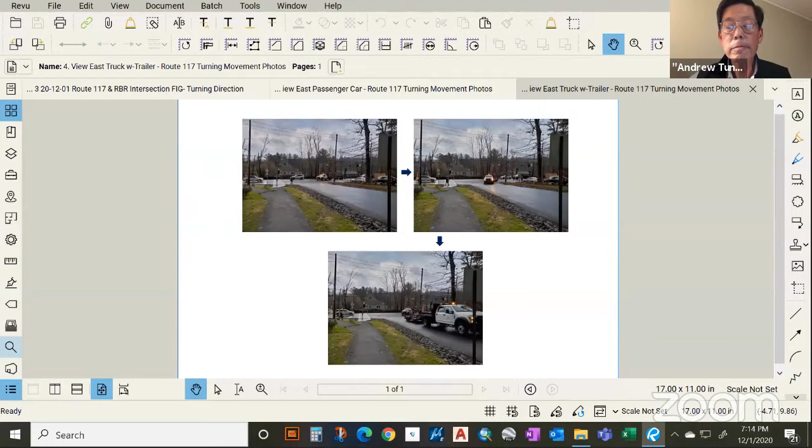The existing conditions on Roaring Brook Road: there's approximately an 18-foot receiving lane for vehicles turning onto Roaring Brook Road, which is quite wide for a single lane road. Then there is a 10 to 11 foot space between the edge of pavement and the stone dust walkway that was installed as approved by the planning board. Then there's the crosswalk across Route 117. So there was the concern about turning traffic and the potential for traffic to leave the travel way.

So in consultation with Maser, who designed the intersection, when there's a no curb condition, the walkway has to be over 5 feet off of the travel way, which it is. In this case, it was designed to be further away. I'll go to some photos in a moment, but you'll see in the photographs there is a stone filter strip for drainage along the side of the roadway that extends over 100 feet down Roaring Brook Road.

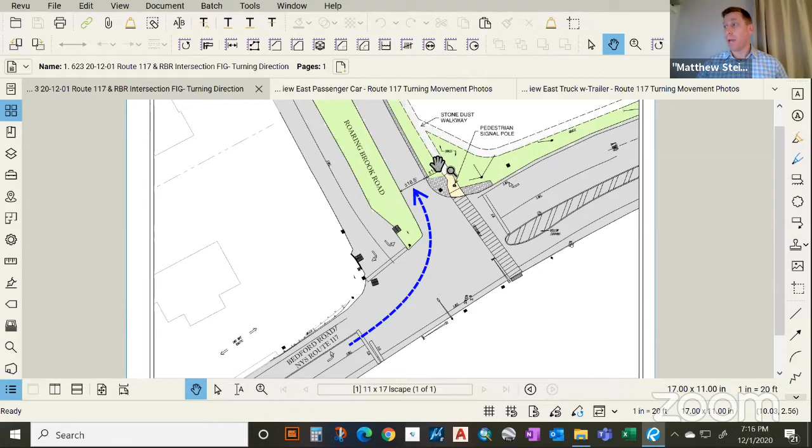It's traversable. A car could travel on it, but it essentially acts as a travelable shoulder that is both a visual and a tactile separation between the travelway and that walkway, in addition to the separation and the distance.

So we went and took a look at the conditions of turning traffic just to observe how cars make that turn, because it was a concern whether or not a car could track further into somebody walking along. So this is showing a car making that turn from that turn lane, and then as it tracks down Roaring Brook Road. And in all the conditions that we observed, all cars were either set in the center of Roaring Brook Road or actually over to the left.

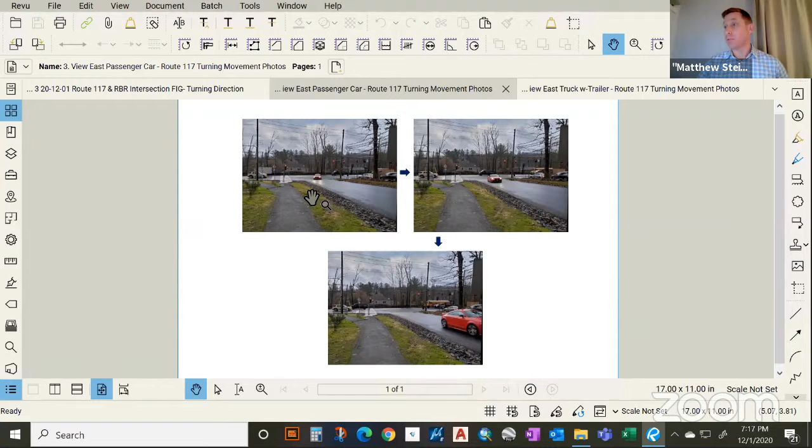No vehicles actually tracked far over, and had any car tracked a little further, if a driver wasn't paying attention, they would actually cross onto this stone interface between the grass strip and the travelway, and that would obviously catch their attention, much like a rumble strip would.

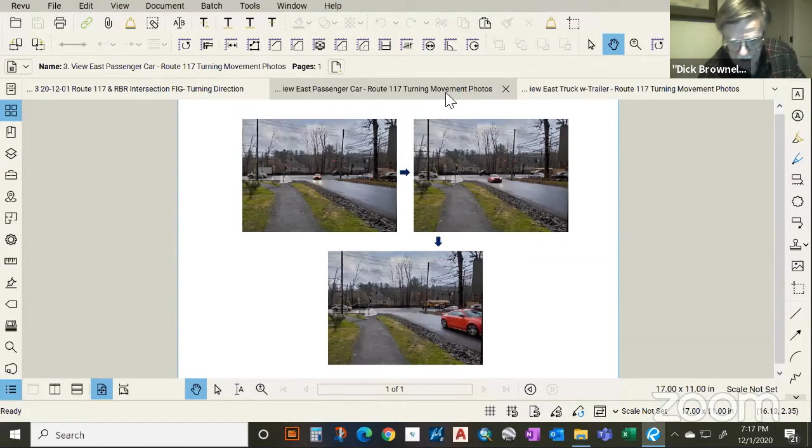Excuse me. My problem wasn't there. It was only down at the corner. I agree with this totally, that there's not a problem along the drainage thing. So we looked at cars turning. So you're talking, Mr. Brownell, about this location, right? Yeah. So obviously, even if there was a curb condition, because of ADA, this would be down with a ramp. So in this area, it would obviously be lower and closer to the road.

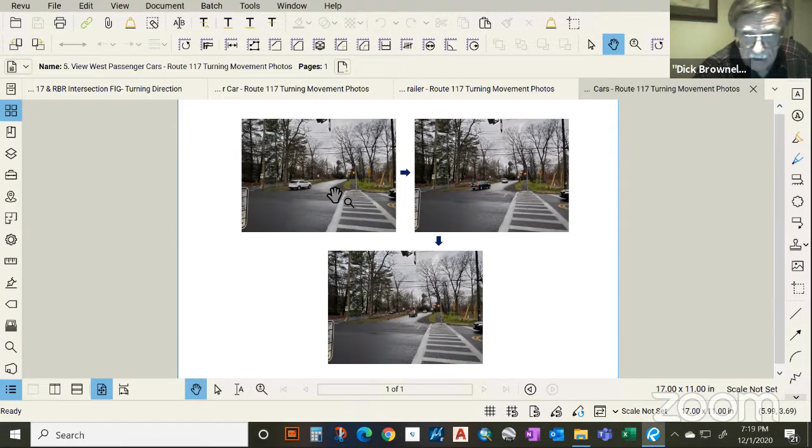But again, that's not where I'm worried. I'm worried to the right of where that white car is. If the guy comes in half drunk or something and doesn't make the turn right, the first part that you described, there's a lot of visibility for people walking down, and they have plenty of time to move. At this corner, if they just don't make the turn because they are distracted totally by texting or whatever, I think it's missing one bollard to really make it more protective. Right now the pedestrian post that was put in acts like a bollard, so that helps me partially, but I certainly think another bollard would be better.

So can I just interrupt here for a second? Because we talked about this, I thought, sufficiently to get the point across at our last meeting. For some reason, the communication didn't get down to a solution. So we're talking about a problem. Now we're talking about a solution, or it sounds to me like an excuse to accept what is there, but doesn't really deal with the problem. The problem, what I think Dick rightfully points out is a concern, is that, and it's not just somebody driving around this corner and using examples of going out and watching people do it.

It's a matter of, in the snow and in the rain and icy conditions, and Dick's other example, people maybe just not paying attention. Somebody slipping sideways through that intersection, because people do tend to drive fairly quickly down this road and making that turn, trying to beat the light. We talked about this last time. I don't understand why. Right.

So we went to look at the condition because we understood that there was a concern of turning cars. This one has a sufficiently wide turning area compared to many roads where there'd be two lanes fit into that same location. Because of the speed and the design of the road, DOT does not allow obstructions in the right of way. Based on the speed of this road, an obstruction would have to be 14 to 16

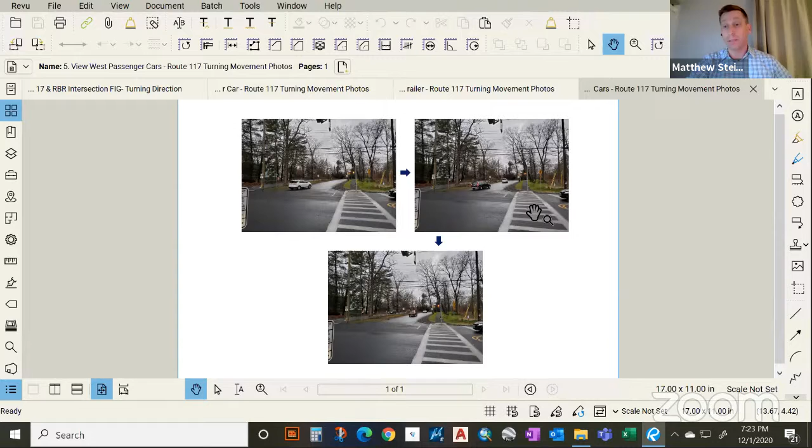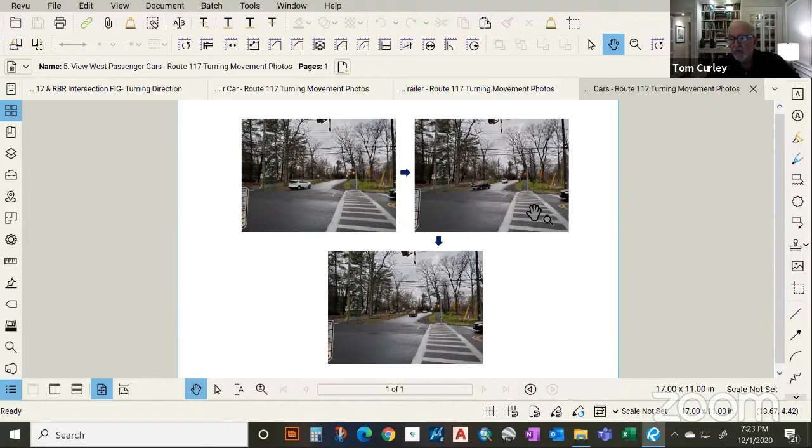This is also an 18-foot lane to turn into, where in many places it might be 11. Other lanes getting onto Route 117 are less than that. It doesn't matter whether it's 18 feet or 20 feet or 15 feet. Once a car starts to slide on ice, it's gonna go until it decides to stop. I don't think we're really addressing what the concern is. If the answer is we can't solve the problem, even though we would like to, then that's the answer. But trying to talk around the problem, I don't think is going to get us anywhere. We can move on if you're telling us we can't do anything about it.

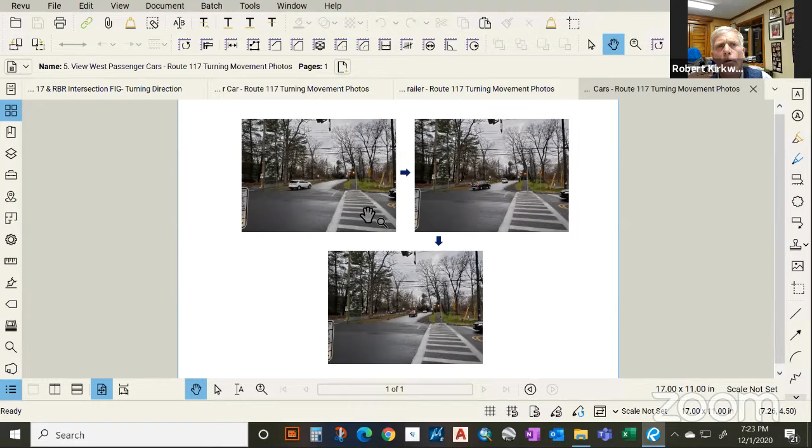Well, I have a question on that, for Matt and probably Bob Scioli. Where does the DOT jurisdiction end on this? Because Roaring Brook Road, as I understand it, is a town road. So where does that jurisdiction end on 117 for the DOT? How far along the roadbed of Roaring Brook Road does it end at the corner? And is it possible it's outside of the right of way of 117 and in the right of way of Roaring Brook Road?

And perhaps it is within the jurisdiction of the town to say, okay, we may not be able to get as many bollards as we like or exactly where we want them, but perhaps we can come up with a solution that's within our jurisdiction. So, Robert, usually in conversation with the state, when we're working with the Chappaqua Hamlet improvements, they usually have so much jurisdiction, so many feet in from the intersection point. I don't know exactly what that number may be in this case, but I think it may be worth the effort to get an answer from the DOT about the planning board's concern about that corner, let them know what the concerns are, and let them write back to say yay or nay.

So at least we have it on record so we know where it's coming from. We'd be happy to review that request. Excuse me? We'd be happy to review that request.

Yeah, I think the applicant, to the board's concerns, should prepare some sort of letter to the DOT and have DOT respond back to the town or the applicant. So at least we have it on record that they have good reasons for why it can't be put there. I mean, they're the experts and they looked at this thing during design. So let them come up with the answer to it. That's my recommendation.

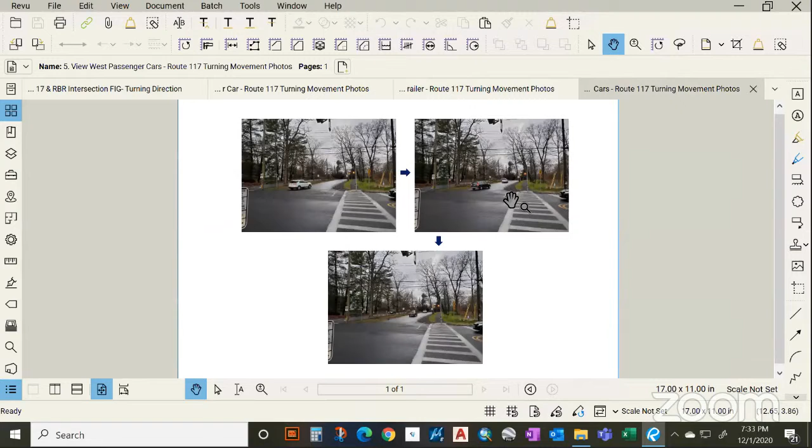So I have a quick question. The stone, how wide is that right now? So in this instance where it runs along Roaring Brook Road, it's 2 feet in width. So in this area, it ranges from 10 feet down to the corner. Yeah. And there's also a gradient going down, right? So if we're talking about a left turn, there's a gradient. So as far as I remember, yeah. If you really look at how the vehicle would turn, you do have some room there. I don't know enough about the bollard and no bollard instance, but I do think the 2 feet would significantly slow it down the way I have seen that. I've done a walk around there.

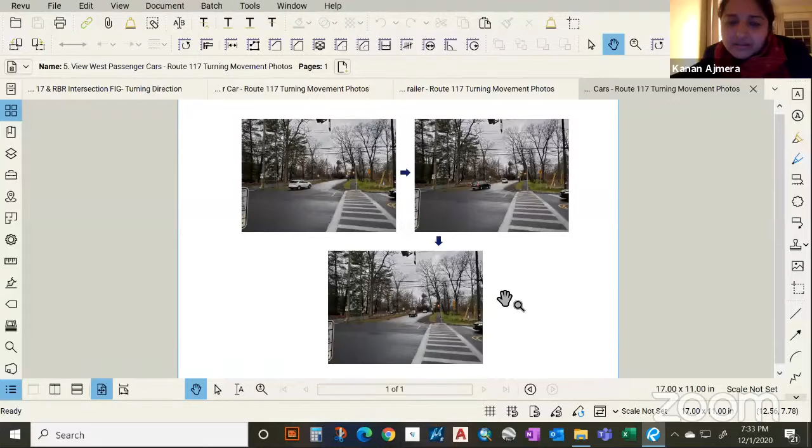Where would you put the bollard if you were to put it in? I'm curious. I think the bollard would most appropriately go to the left of the signal pole. And if you can go back to the plan. Yeah. So this is the pole right here. To be able to protect somebody standing right waiting to cross. Yep. Unfortunately, and we can ask the DOT that, they do control the land that the signal pole sits on. So I believe they control the land between that and roadway paving.

And so our concern is somebody walking on the path will not have a chance to react, correct? If they happen to be on the wrong side of the signal pole. The signal pole, as Mr. Kirkwood points out, I think acts as protection. And just recently, I'd like to add that the DOT on their approved punch list to us had us relocate that signal pole to its current condition, which is more in the pathway than it was before.

In fact, the concrete base for that signal pole, because of field conditions when it was originally installed, was much larger and would have probably given you the protection that you're asking for. But they had us actually demolish it and move the signal pole into the walkway because they thought that signal pole base was too big, and they didn't like where the signal pole had ultimately ended up because of the stormwater and everything else that we had to deal with out there.

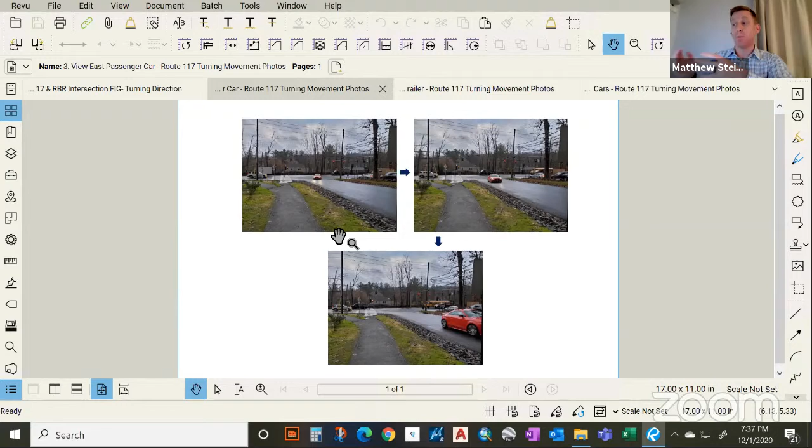Yes, the stone is 2 feet here, and then about another 6 feet. So it's 8 as you get further up Roaring Brook Road. But as you get to the corner, it flares out a little bit. But it's a minimum of 8 to 10 feet between the edge of pavement and the stone dust pathway here. But yes, it is closer, obviously, at the corner. And I apologize if we misinterpreted Mr. Brownell's concerns. Okay.

I think Eldad's comment is. One last question, I'm just curious. On this intersection, there's a black square. What is that? And then there's two others. Yeah, three others. These are the covers for the signal pull boxes, essentially the controllers. Essentially a small vault, is that what that is? Yes, it's like a small buried vault, so it's just a flat metal cover. It's like a plate. Correct. Got it. So that would not afford any protection whatsoever to a pedestrian then. No, it's probably as low as the rocks. Yeah, okay.

I'm glad you asked that question, Dick, because I was interpreting that as one of the poles. Yeah. That's very important to know. So it really is wide open. Yeah, and Tom raised the right conditions. If it's icy or snowy or whatever, and someone's going a little too fast.

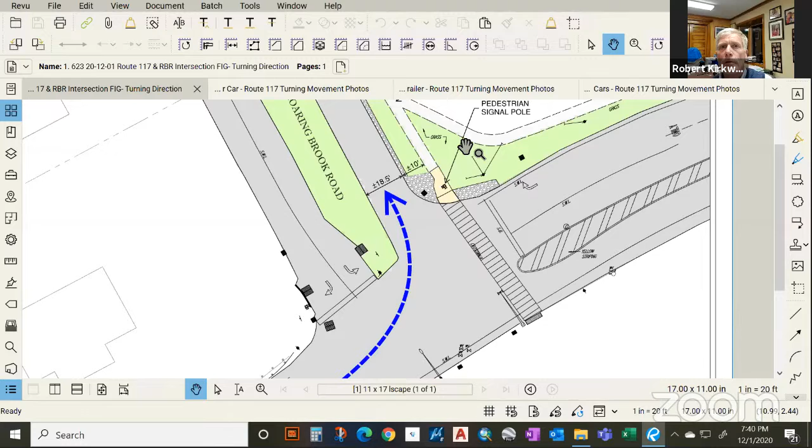So, Bob, would you try to find what the town's jurisdiction is too, and where the town right of way is on Roaring Brook Road on that side, and see where these things might come together? Actually, David, didn't you guys prepare an as-built? Hopefully you have good survey location of this right of way when you submitted it to the town. Is that corner shown, David? I believe that it is, Bob. Okay, great. We should have that, Robert. I will get that for you.

So if I can just add one thing here, not to extend it too much, and really not to be hyperbolic about it, there's a high school right down the road here. And you have kids driving, and I've got a son who, when he was a teenager, slid sideways through ice into a curb and ruined my car. And another one who drove his own car and slid sideways into our garage on ice. Now, we're fortunate because they don't live here anymore.

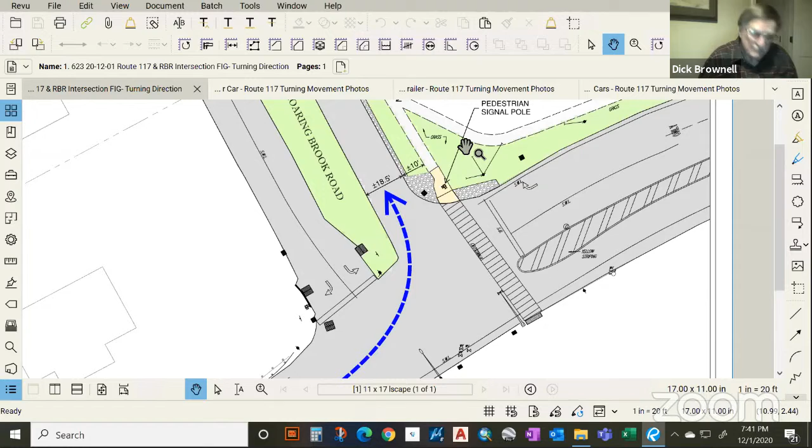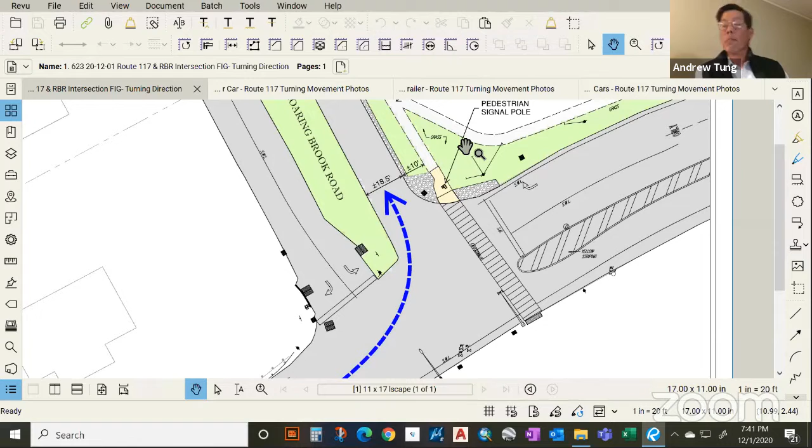But the fact of the matter is that you have drivers here who may actually be inattentive. And this might be a condition which is unlike every other condition which has been proposed here. It might be a special condition that needs a little bit more attention. It's a great point, Tom. Thank you. Okay. Okay. Thank you, Matt. Thank you, Andy. We will follow up on that.

The other update I wanted to bring to you is that we did, as the chairman mentioned, make a submission just before Thanksgiving to address a number of the town engineer's comments from his November 15th memo. With that were included updated drawings that included pond details, construction sequencing plans, the loop road set, and the MFPD plan, and an updated residential subdivision plan.

And Mark Ratz of our office has been in contact with Mr. Scioli and stands ready to continue to review those items with him. We provided clouded versions of those drawings so that he could see the changes that had been made, and supplied a red line tracking table with that. So we will continue to coordinate with him and look for his additional comments from that submission.

With that, I'd like to go to a short East Village site plan presentation. We've been working with the planning board for about a year since the town board adopted the amended PDCP for the East Village, and about a year before that. So as I start, I'd like to thank both the board and its consultants for their diligence and help as we've basically taken the PDCP plan from a concept plan to a more detailed plan, but with very few plan changes along the way. We start with the illustrative plan, Matt.

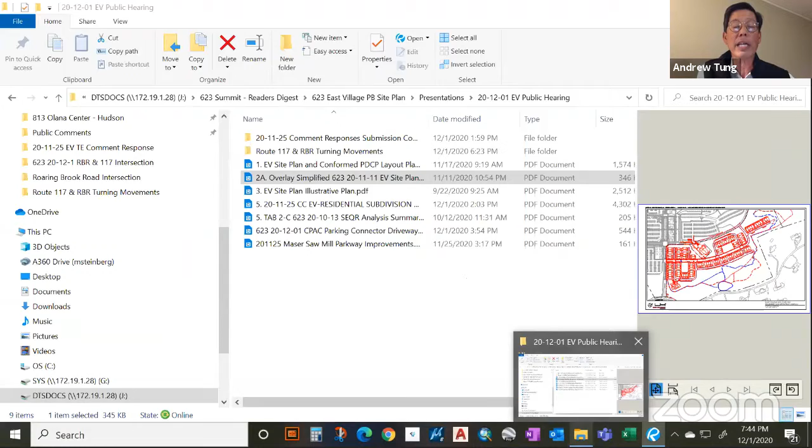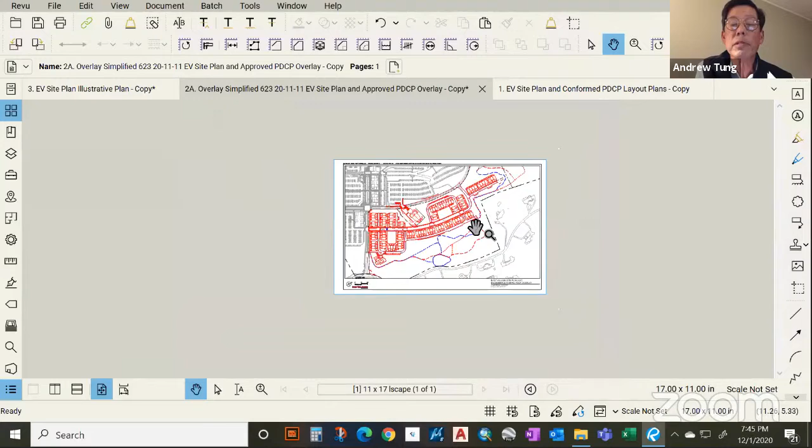The next two drawings show the East Village plan as currently proposed in comparison to the PDCP plan that was approved by the town board. I think it's on the same page. They're both on the same page, just move down or move up. There we go. So the bottom is the PDCP. The top is the East Village site plan.

When you overlay them, the one drawing that we were just looking at, you can see that the red basically covers the blue. The buildings are basically in the same locations. The roadways are in the same locations. Some minor changes. You can see at the bottom of the page, the trail system has been adjusted slightly to avoid some earlier incursions towards the pond, to reduce the extent of walkway within the buffer while still providing a connection from left to right across the meadow, and also to account for changes in grading that were created during the refinement of the site plan.

There was, in addition, one walkway added. It's actually outside the East Village that connects the retail parking area at the top left to the auditorium. So that was the extent of the plan changes that were made from PDCP to site plan.

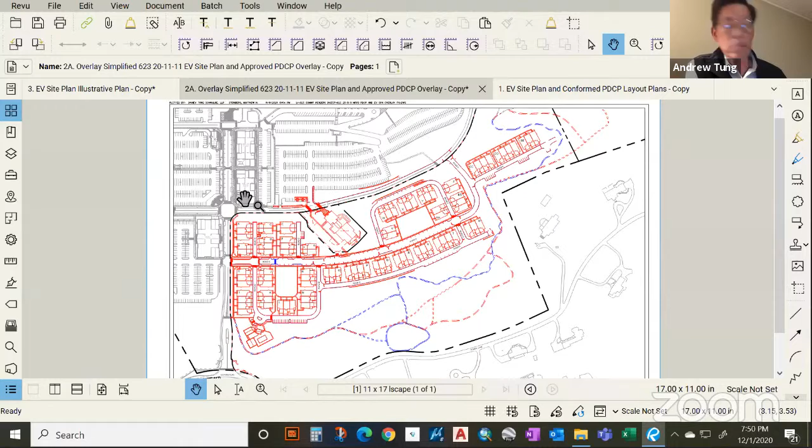Well, one of the things that we've always done in trails is sought connectivity. So when we have trails out there, to connect those with existing ones. That was something that we've always looked at and tried to emphasize. Look, this is not a showstopper, of course, but perhaps we can look at this. I think it would be interesting to see where the offsite trails are that you're referring to, and how they might connect. The value in these kinds of trails is their connectivity and their usefulness to members of the public.

Yeah, it's not really a trail, I believe. Dave, don't they just mow up to the edge? The Cowden Lane folks just mow up to the edge. They have not mowed trails in and around the pond. They just basically take it from the edge of Cowden Lane Road and clear it and use it as an area to recreate or walk or something along those lines. But there's no trails. Okay.

Well, still, nonetheless, I think it would be valuable to have some connection there from whatever they use right now for their recreational and environmental uses to connect. Whether it goes all the way around the pond, it may not have to do that, but somehow link in with your red trails here, I think would be helpful.

We could make a connection down to an open lawn area that they clear now. And so that would be, not marked, but you could certainly get from one to the other. Right, right. Okay, thank you, Andy. Yeah.

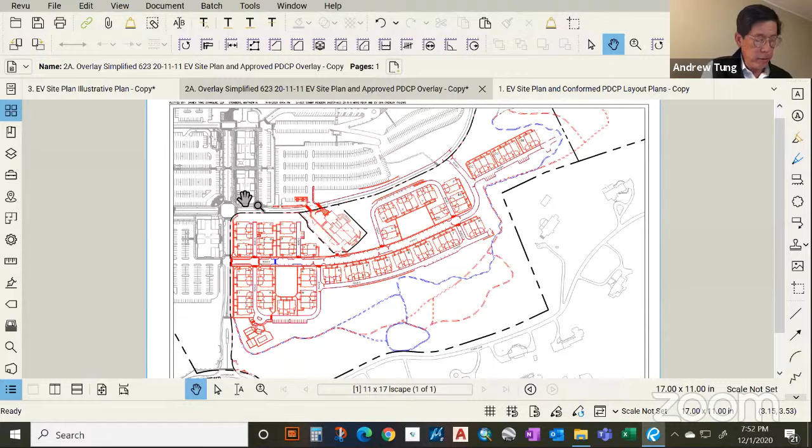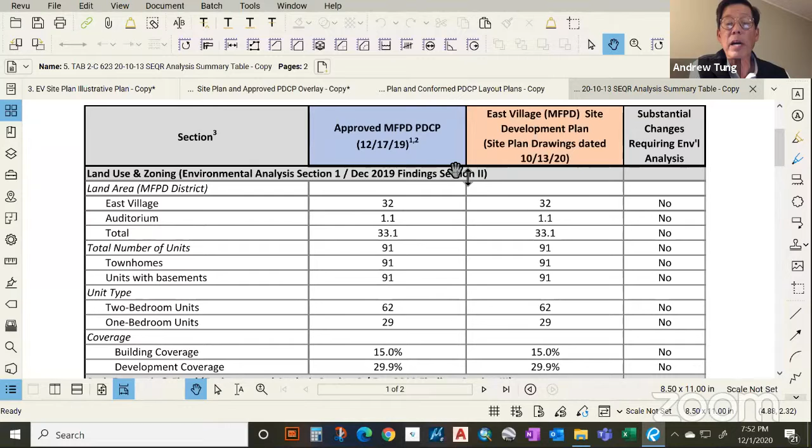So not only in plan view does the site plan conform to the 2019 PDCP approval, there have been, as we document in our latest submission, no changes to the environmental impacts that were studied. This is a table listing impacts that were studied in the various EISs and listed in the findings statements. At the top of the page, there's a column that shows the approved MFPD thresholds, and then in orange, the East Village site plan thresholds, and they're basically the same across the board. And we've reviewed the SEQR documentation and presented that to the board for its review. Right.

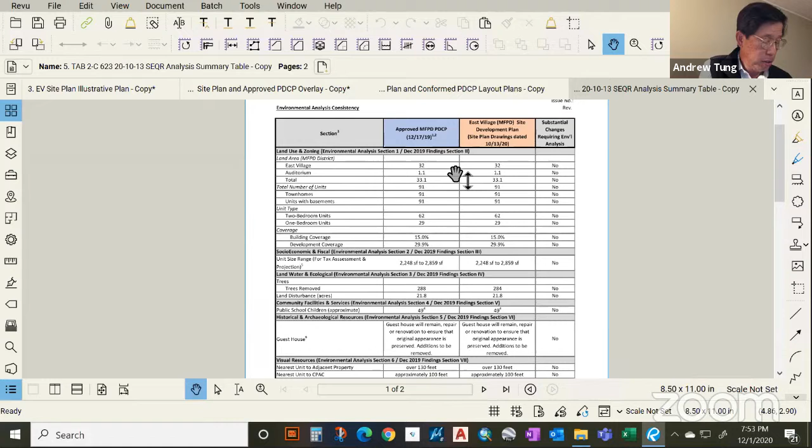Thirdly, there were a number of conditions in the PDCP approval, one having to do with the guest house, or rather a series of resolutions having to do with the guest house. As you may recall, it's located at the bottom left of the screen here in the East Village plan. And we have been working with both the building department and other town staff in stabilizing the demolition, reviewing plans for future renovation and incorporation of that original building into the guest house facility.

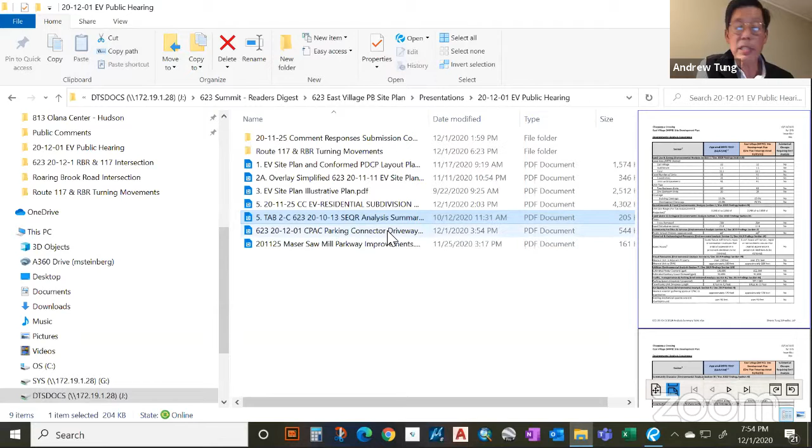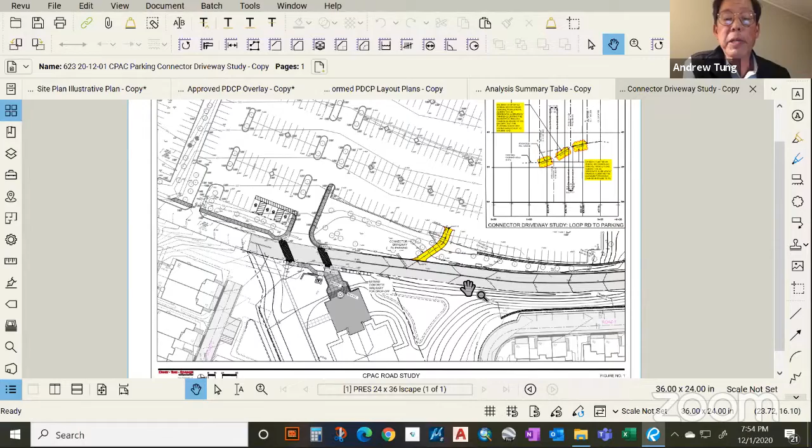Now, at the last meeting, we had another question from the board that we studied, which was the potential provision of a connector driveway, I'll call it, from the Loop Road to the parking lot opposite the CPAC. And this is a sketch that we just finished today, so I was not able to submit it ahead of time, which shows, if you zoom in just a bit there, Matt, at the bottom by the CPAC drop-off, the extension of a concrete walkway as a place to stop, because you wouldn't want to stop in the middle of the crosswalk to drop somebody at the CPAC stairs.

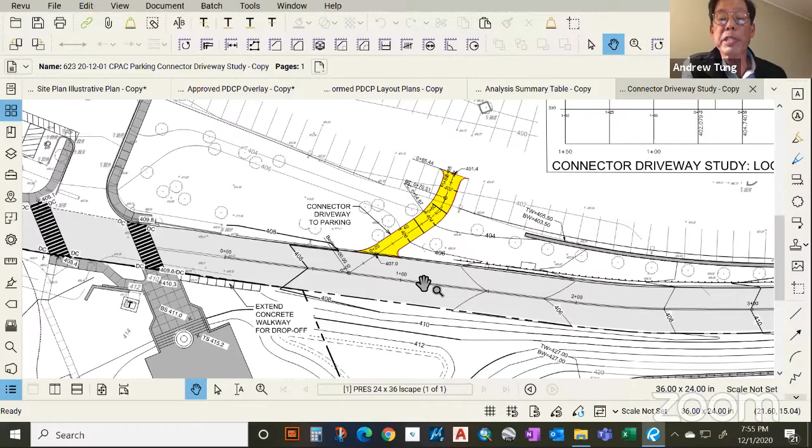You'd pull up to the extended walkway and then potentially pull across the Loop Road to connect down to the parking lot. And we looked to see whether those grades would be achievable. If you go then to the profile, what we found is that there's about a 6.5 foot change in elevation from the Loop Road down to the parking lot.

And following the guidelines in the town's zoning code for driveways, we find that in a number of parameters, we exceed the maximum permitted. And we've submitted this to Mark Gratz, submitted this to Bob Scioli for an initial review this afternoon. I'm sure he hasn't had a chance to look at it, but we would look to continue to work with Mr. Scioli to review this, to see if there's any alternatives. At this point, it doesn't seem to meet those parameters. It's a little steeper than it could be, but we have prepared this and would look to review that further with him.

I'm sorry, Mr. Tung. Yes, sir. Were you going to apply for a variance because it's only Board of Appeals? The variance would be to increase the steepness of the driveway. I don't think we would recommend from an engineering point of view that you increase the steepness of a driveway, certainly because of the shortness of the stretch. You know, if you have a longer driveway that's steeper, it's easier to become accustomed to that

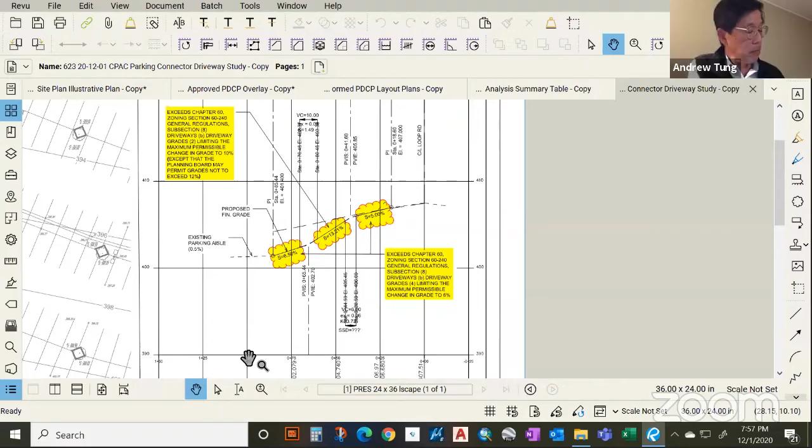slope. But here, the zoning code calls for a maximum break between sections of a driveway, as well as a maximum total slope. And because of the change in elevation and the length of the drive, we can achieve neither. But Mr. Scioli can look at that and see if he can make any suggestions for us, and we'll be happy to take them under advisement. Can you go back to the drawing of the actual, not the grade there, but yeah, that. Thank you. Okay.

Okay. Can someone point out what's happening as in the drop-off? Like, can someone just show it with their cursor or something, how is one getting down here? I just want to understand how a car coming here is turning or moving.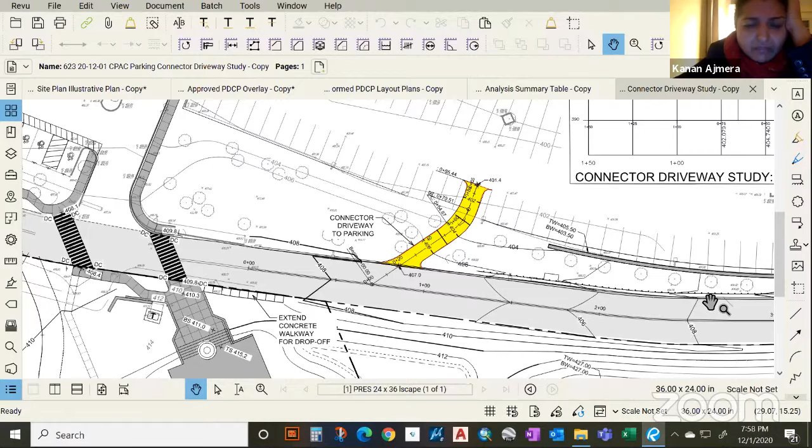So the loop road goes around the center of the site. Yep. And enters the driveway on the left to get to the main office parking area. Yep. There are two sidewalks shown in gray that extend from the parking area, so that if you went and parked, you would walk along one of those sidewalks to one of the crosswalks and across to the landing at the bottom of the CPAC stairs.

Yep. One option for drop-off that we had originally noted was that you could turn, rather than stopping on the loop road, which if you were to stop in front of the landing would block the crosswalk, you could pull into the parking lot if you were coming from the left or the right and drop off along the long sidewalk on the right. And people could walk on the sidewalk and go to the crosswalk, across to the landing, up the stairs to the auditorium.

There was a discussion at last meeting and a number of meetings. Well, is there an opportunity to potentially drop off on the side closest to the auditorium and then get into the parking lot in a quicker way rather than going halfway around the loop road to get into a lower entry? So one of our challenges is that there is a change of elevation between the loop road and the parking lot, and a fairly narrow stretch of land in which to put the driveway. Got it. Right.

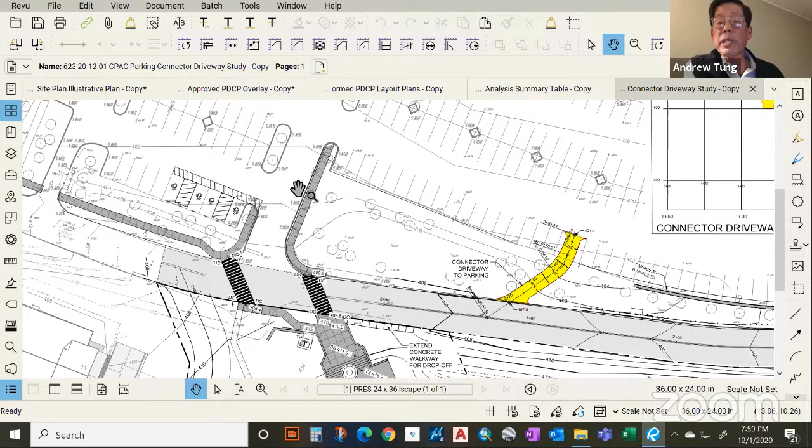You go back to the site plan. Yeah. Another condition of the town board's approval was that one townhome in block U be relocated further inboard in the site. There used to be 4 townhomes in that location. That townhome was flipped over to the center group of townhomes, but now there were 3 that increased the distance to the north property line in that location by about 35 feet and saved about half a dozen trees.

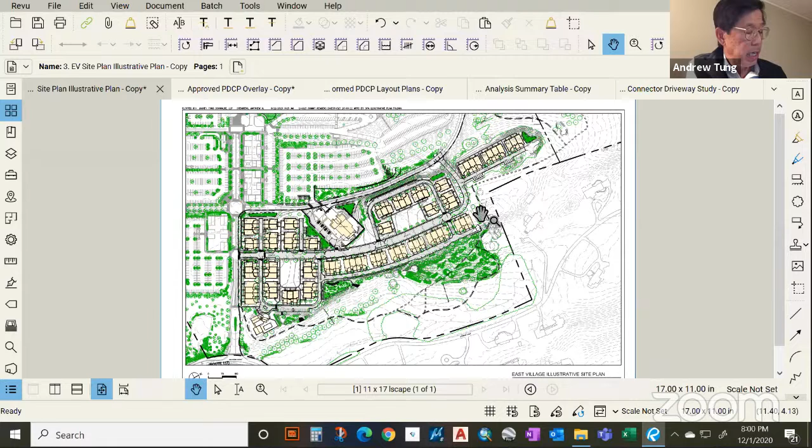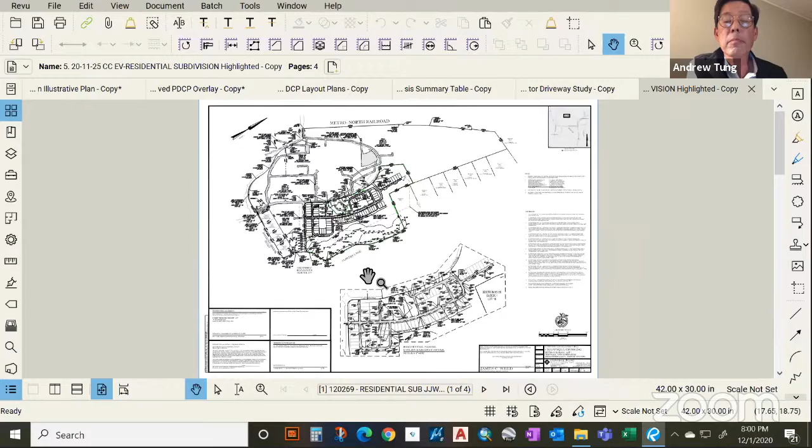In terms of the East Village site plan itself, just to review, there are 91 fee simple townhome lots. Townhomes on individual lots. We have submitted an updated subdivision plat showing those lots. That green highlight is the 32 acres of the East Village. It forms the east side of the Chappaqua Crossing site. And then within that subdivision, created by the master subdivision, there would be 91 townhome lots. You can see them individually along the interior roads, as well as one common lot that is about 26 acres in size.

So the net result of our working with the planning board over these months is to fully detail out the site plan, both in terms of architecture, site design, landscaping, stormwater management, and utilities that is coordinated with and conforming to the PDCP that was approved by the town board. And we look forward to any additional comments that you, members of the board or the public may have.

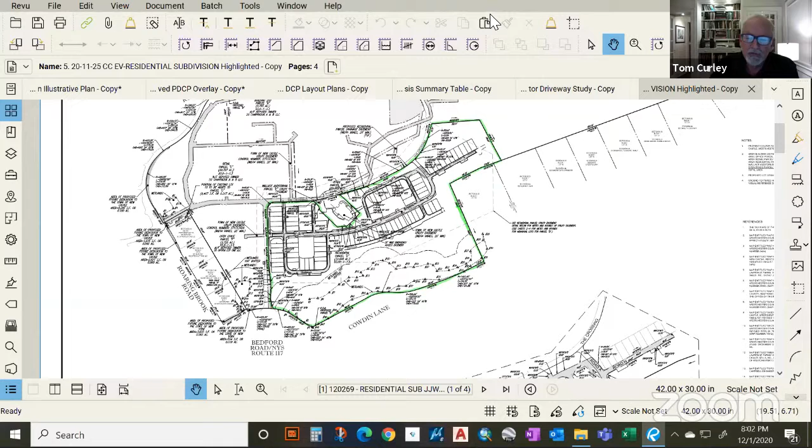Okay, thank you very much, Andy. Sure. Questions, comments from board members? Again, we haven't received the updated material. We'll get that later on, of course, but any initial thoughts, questions? Well, I want to get right to Bob on the subject of, if you could get that drawing back up again, Andy, for the drop-off condition. Yeah. Bob, I know you probably haven't had much time to study this, probably no more than we have. Do you have any thoughts about this?

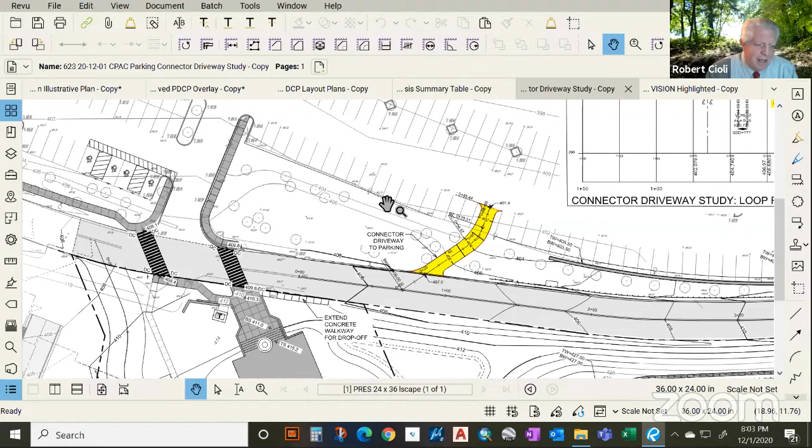So basically, the delta from here to here. This difference in degrees can't exceed 6%. So when you get 6.5 minus 13.21, you have a difference of 6.71%. So that technically exceeds the grade by 0.71% per code. So that's one area of the code it exceeds.

The next one is this gradient here is 13.21%. Does everyone see that? Yes. Here. The maximum grade based on the chapter is 10%. The planning board could allow up to 12. So if the planning board is inclined to allow 12, they would exceed it by 1.21%. If not, they would exceed it by 3.21%.

Right. Now, as Clinton stated before, anything that's in chapter 60 can only be approved by either the town engineer or the planning board. However, correct me if I'm wrong, Clinton, the applicant could go before the zoning board of appeals and get relief from these exceedances. Is that true, Clinton? Yes, I believe so, yes.

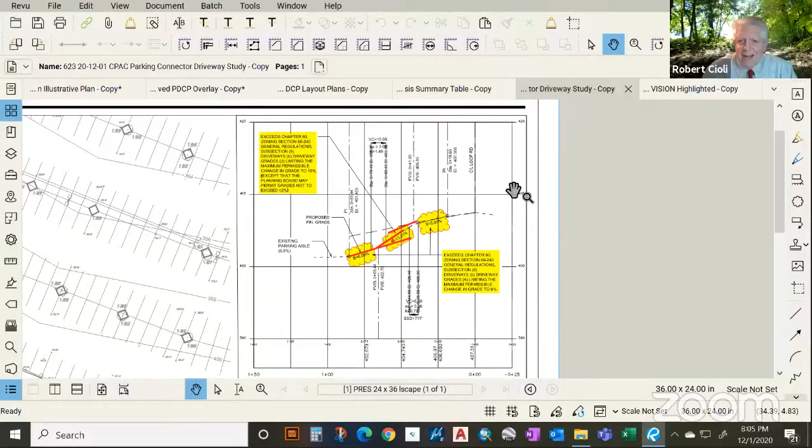So, that would be up to the applicant if they feel comfortable to go before the zoning board, and if the planning board is really inclined to have this, to obtain those variances from the zoning board. It happens at building department level sometimes. So that's their option. I don't know how Andy feels about it, but they're more than free to do that as a matter of course. Well, before we go, can I interrupt?

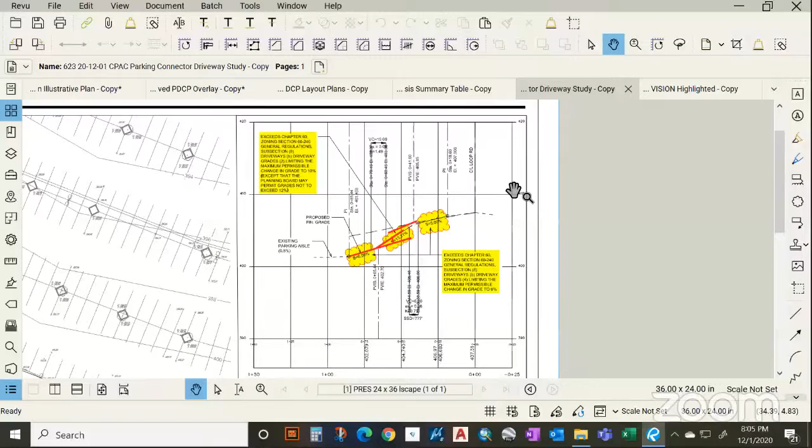Before we go that far, I'd like to ask about the drawing, because it says here that the blends maximum 6%, which is change in grade, and at the top it says it's 5%. If that's 6, doesn't it reduce the 13.2 down to something which maybe is a little bit closer to 12? And potentially get the lower blend down to 6.

Well, you're right. That's a good point. When you're coming off PI station 1860, elevation 407, Tom, you can bring that grade down a little bit more, and it might help the gradient going between the two entrances to the driveway, and you might drop that 13.21 down. You'd have to play with the numbers and see what you get, but that's a good point. Yes, you can do that.

Yeah, so if I may, we treated that top 5% as coming off a loop road, in the same way that a driveway off a road has a maximum of 5% for the first 35 feet off the center line of that road. That's why it was set at 5%. Well, if you read the code further, you can go up to maximum 7%. Okay, I didn't see that.

So I mean, to Tom's point, you can actually increase that, say, 1.5%. And when you come down at 25 feet, when you do the math and differential between those two aprons, you might drop it down a bit, which is going to help the variance as well. So that's a good point, Tom.

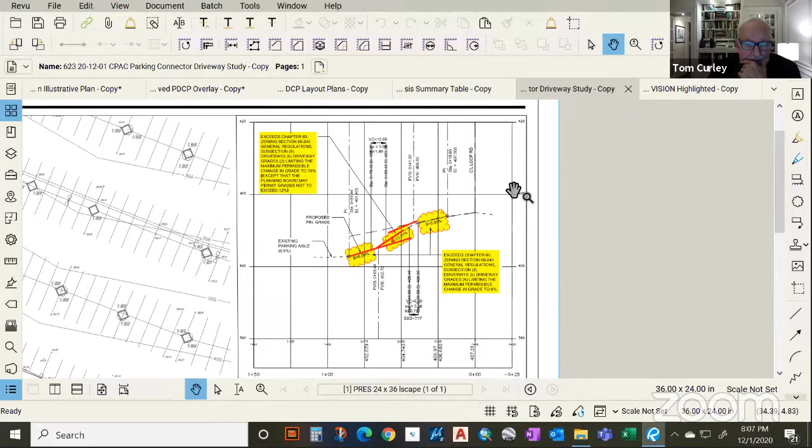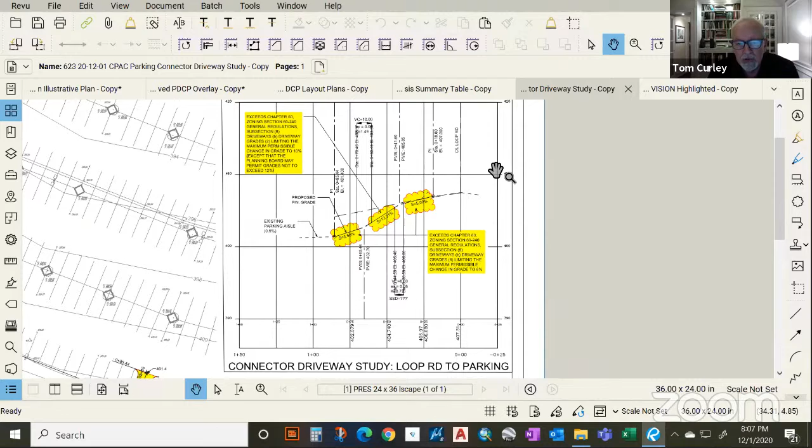Yeah, I'd also like to point out that this drawing looks to me like it's an exaggerated vertical scale. I don't think it's one to one. Andy, isn't this an exaggerated vertical scale? It is, but typically road profiles are done exaggerated so you can see the change. Okay, fair enough. For the public looking at this, they may not understand that, and may say, "Oh my gosh, I don't want to drive down that thing." So it might be helpful to have a supplemental drawing next time that shows the true profile. We're happy to do that.

Thank you. I'm actually encouraged very much by these figures and having them so close to the permitted code levels, because it seems to me that with some tweaking and attenuating the angle going down to the parking lot and giving us a little more space to work with without going up any higher, there may be ways of bringing it within the code and within our discretion. So I thank you, Andy. I thought it was going to be tougher, frankly.

I think there's a good chance that we can get this to work without having to go through the zoning board of appeals and extreme waivers, et cetera. So thank you. I know Bob hasn't had sufficient time to look at this, but from our standpoint, as a matter of policy, this makes good sense. So figuring out a way to make it work is something we would be really interested in seeing. Well, we're happy to have Bob's input, and we'll work with him going forward. Thank you.

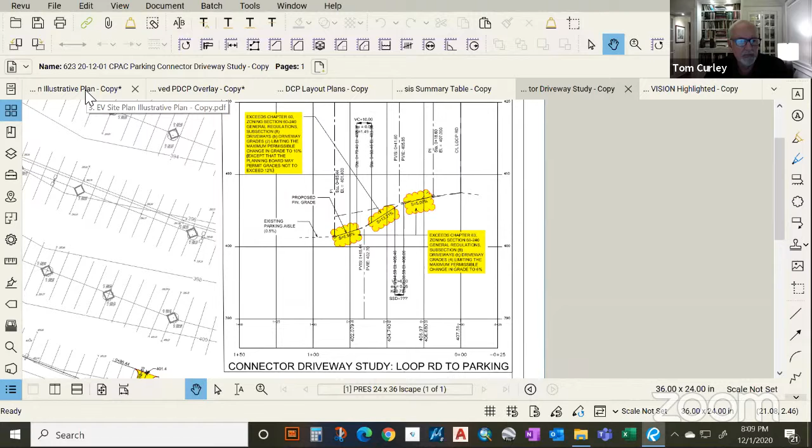Will do. I have something that appeared on one of your drawings, and maybe I haven't been paying sufficient attention to this part of the site. Andy, could you get up the overall site plan that shows the building footprints on it? Not the lot lines, but the building footprints. Yeah, that one. Can you zoom into those units which are on the upper right? That's good enough right there, thanks.

So all of a sudden, I realized that this road H, the buildings actually have their front door facing to the upper left rather than to the road. What we're looking at here are the garages on road H. And it's the first time I picked up on that, and I apologize, but road H ends up being the address road for these units. And road H really serves as an alley. That configuration on all the other units would be essentially an alley.

I'm sorry, can you zoom out again? Yeah, okay, right there is good. So along road F, that block which is B, B, and Z, that also has the garages facing the road and the units facing the other way. But no, that one's okay. Forgive me. So C, C, D, D, and E, E essentially have the access road to the units going to the back doors of the units and the garages. And I think I understand why it's that way.

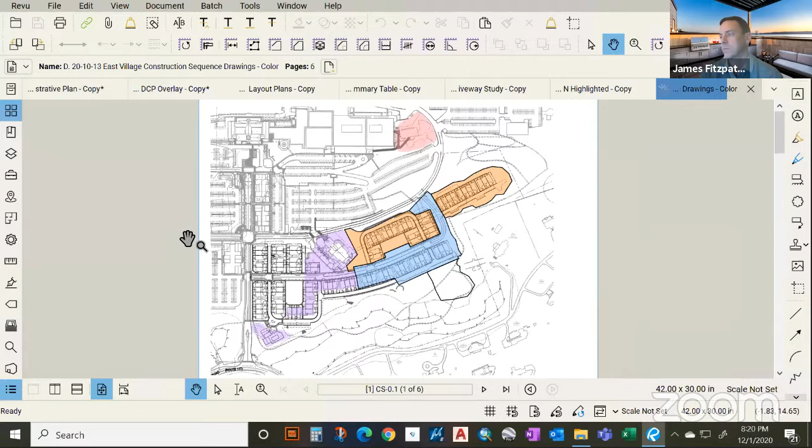Yeah, so our construction phasing plan was really born out of necessity to manage and balance our earthwork. If the board remembers, that was a pretty detailed analysis and exercise that we went through about this time last year, the winter of last year, making sure that we had our phasing all worked out so that we were balanced from an earthwork perspective. So those phases in orange are the final phases of the project.

With the phases up in light pink reddish color being the initial phase, which will be our model homes, sales office, and also an offsite detention basin that we need to construct first for stormwater control. And then we'll move into the yellow, which will allow us to complete the loop road and the retaining wall, and then over to the purple, which will allow us to move into our clubhouse.

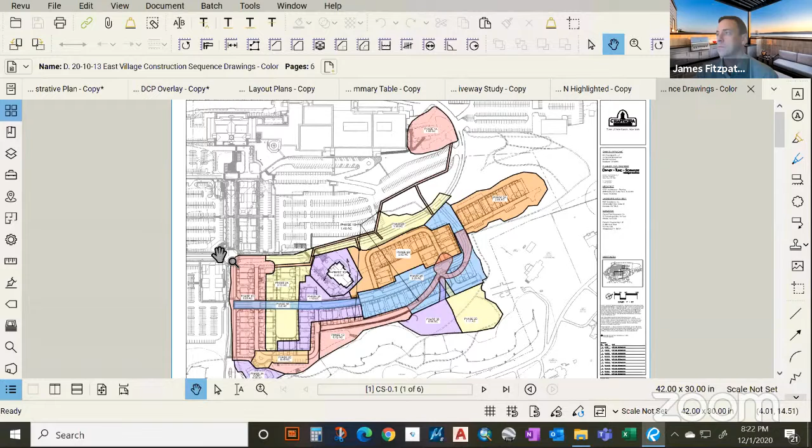Yeah, so Eldad, I'm excited about the project too, and I just want to give all the credit to James and his team, and to Felix and his team. They've been really terrific to work with, and getting this far. And I think that I'm feeling very comfortable with where we are. I don't anticipate any big surprises. I think we've been through it in detail. And I really appreciate their help. And I think we're going to have a pretty nice neighborhood up here, which I think is what the site calls for.

Thanks, Tom. I mean, you and I spent a lot of time on the corner and other places, and a lot of your fingerprints are on this project and have helped it. Obviously, it's taken a little bit longer than probably any of us wanted, but I think we've solved 90% of the issues that have been in front of everyone. And I think the ultimate result of the collaborative effort that's occurred both at retail, at the 200 building here at Chappaqua is, overall, a project we can all be proud of. And I appreciate everybody's input and at times their patience with the fact that I've lost my patience.

Well, we never noticed. We've been known to lose our patience as well every once in a while. So we appreciate you sticking with us and getting through this as far as we have. Well, Christmas wouldn't be Christmas without the planning board, and frankly, being that we're in December, I don't know what else to do. So here we are.

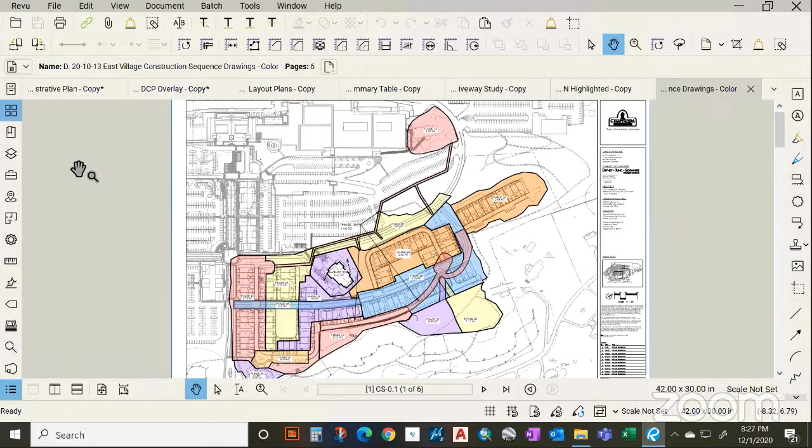I had one other comment, just looking at the layout. I know that people don't always use streets in the East Village. They don't necessarily use the pavement or the alley or the road. They don't distinguish. But I'd like to think that there is going to be a lot of pedestrian traffic on those various surfaces, and it's hard for me to visualize. I haven't really been following the development of the East Village much, so I can't say that I understand this, but it looks like it begs for some kind of public space that ties together the pedestrian experience. Andy, could you help this discussion by putting that site plan up again?

So I see some trees. I don't really see sidewalks necessarily, because the people could walk on the loop road or on the Road A, I guess it's called. But is there? Do you have a sense that there's a community experience moving through here? Andy, could you describe this?

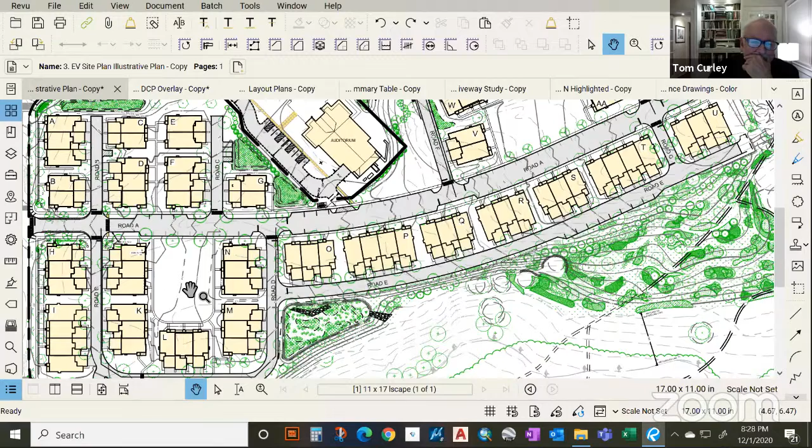Yes, the walking experience, Mr. Lewis, has been a critical component of the East Village since this arrangement was changed, probably with Tom's help, at least 3 years ago. The buildings face the main Road A. There are sidewalks on both sides of Road A. There are sidewalks interconnecting all the fronts of the units. You can see in the first open space on the left, there's an open lawn with a sidewalk running around it.

So the location of the East Village in close proximity to the retail center was key in making that pedestrian connection, not only to the retail center, but also to the 200 building and the office building, has been a key element of Chappaqua Crossing planning for many years. It's been requested by the planning board, picked up on here and adopted as a key component of the Chappaqua Crossing circulation system. So it's designed as much for walkers as it is for drivers.

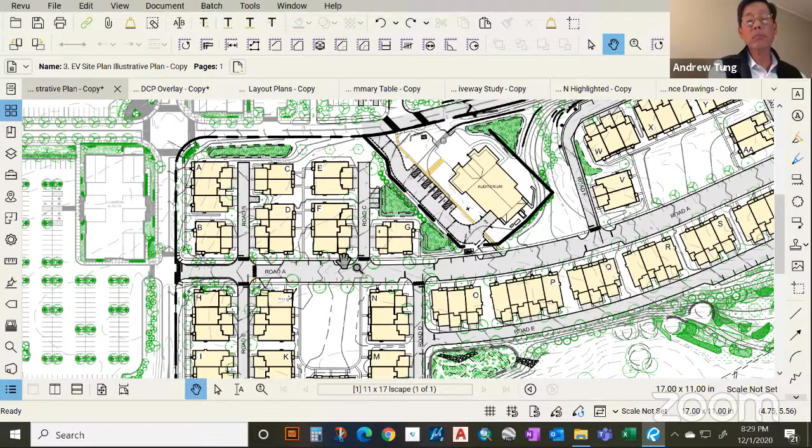So we see sidewalks and parallel parking both sides and a two-way street? That's correct. Thank you. Yes, if you could zoom out to the whole plan for a second, Andy. So it's a relatively big neighborhood, and it's a long one. And one of the things that we thought would be good to do was to try and break down the neighborhood a bit by creating sub neighborhoods.

And to do that, there's the introduction of these smaller green spaces on two ends of the project, the ones that the blocks K, L, M, and N surround, and then further to the right, V, W, X, Y, and AA. And those are a common park green space. And then there are other units which are more like traditional mews units, like D, E, C, and F on the left, upper left,

that provide an address for units, all serviced by traditional alleys, which are the sub roads, Road E, I can't read it here, it's like an eye doctor test. Yeah, that give access to the parking garages and the back doors of the units. So the addresses of the buildings are either on this main neighborhood street, which is Road A, or a park-like unit, or a mews environment. And that's why the CC, DE, DD, and EE up in the upper right are kind of disappointing, because we couldn't get that done up there. Mm-hmm. Thank you.

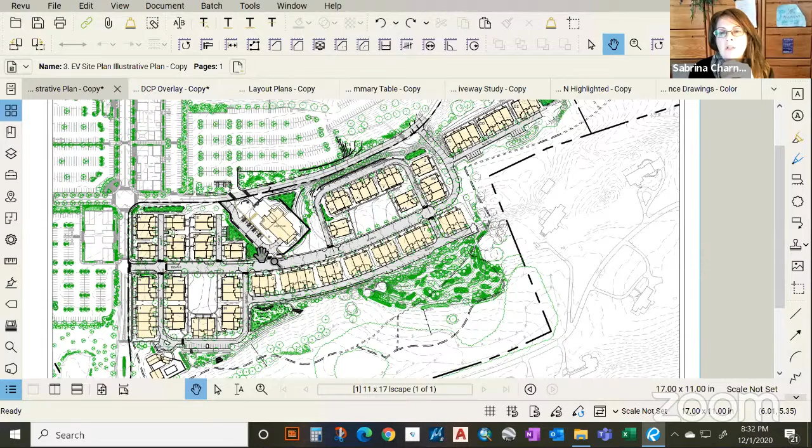As you saw with today's resolution for NICIC, it was a very last minute submission to you. And this is going to take a lot more to make sure we get all of the information in there, particularly given the specific changes that the board has been making tonight and discussions that may be had on the 15th. So we can attempt, per the board's direction, to compile a resolution, but I would be hesitant to say that we will have it done by the 15th. We will try our hardest.

Well, I think at the very least, then we can adjourn the public hearing and plan to re-meet on this on December 15. If there are any additional changes, additional information, additional headway that we hear from the applicant, that's fantastic. We still have some issues that we want to hear about and work on with Bob, for example, in that turnoff. So there's a little bit more work to be done here, even some of the little tweaking down there with the trails. And so the question also, Mr. Chairman, is the applicant going to be able to submit the documentation necessary regarding the discussion tonight? When do they think they'll be able to submit that?

With regard to the intersection, that will take some coordination and potential contact with the DOT and Mr. Scioli. So I would ask that that be a condition rather than a precondition. The other information regarding the trails can certainly be done shortly, and the ramp, we can coordinate with Bob as to how to make the ramp work. That could also be done in the short term. I think those two items we can certainly get back to the board. The item on the intersection will take a little more time.

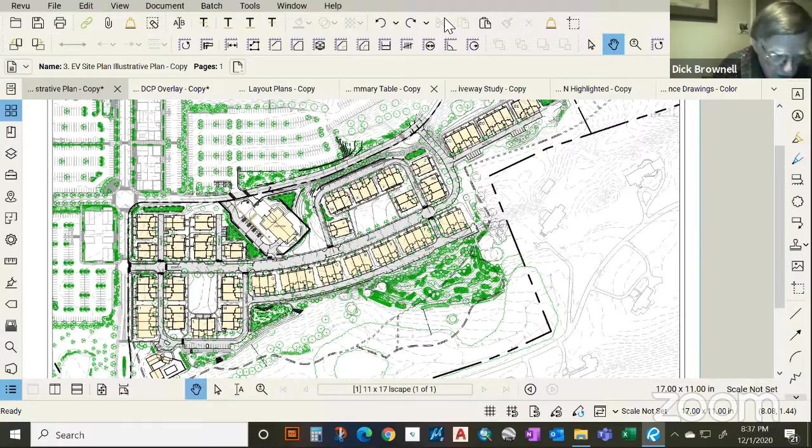Oh, one suggestion, Sabrina, to try and get this all farther along faster. Usually in these documents we have all of the documents that we've used. That'll be about 6 pages probably. But then we get into the whereases, and some of the whereases are pretty easy to do. And there's a couple that'll be hanging maybe. So the whereases and what's left to be done is something that maybe you could get out a little faster, given all of the other issues that you have going. We will do our best. We can add the other stuff later. Right. Well, I would hate for the board not to have a completed resolution to adopt on the 15th. Yeah, we can't vote on a resolution that's not complete.

To be quite honest with you, it's going to take a bit to put this resolution together. We're going to do our best to try and get it done. That's all I can promise at this point. It could be a beast. Understood. And let's all hope that we stay healthy too in the next couple of weeks. Things are spiking and it's a little unpleasant. That's true. We'll give it our best. Okay, so we'll see you guys then on the 15th. Very good. Thanks, guys. Good job. I'm leaving also, Bob.

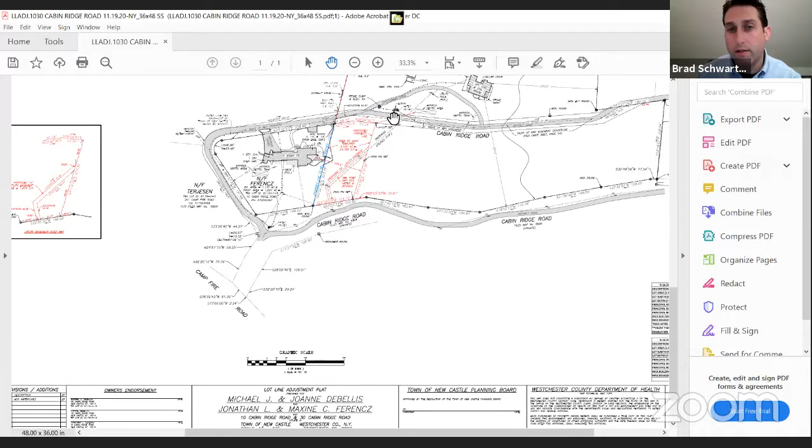There's currently overhead wires that service the DeBellis property. So there would be an easement within this half acre lot that would make sure that Con Ed and DeBellis and any future owner can get access to maintain those above ground utility lines. So Brad, can I ask a question? Sure. That overhead utility, the power line, does that serve only those two properties, or does it serve other properties in the area? My understanding is just those properties. Thank you.

So I'm curious about this lot line move. Is there any disadvantage or any real practical problem with where the lot line is now? Have there been incidents that have caused a problem, or it seems to me that it's a relatively benign condition because it's all woods over there anyway, isn't it? Exactly. And both properties are currently zoning compliant. Both would remain zoning compliant after the lot line change.

So it's just an opportunity for, again, for the Ferenczes to acquire an additional half acre. They've sought to do this for quite some time, literally decades back. They've always been interested in acquiring some additional land on this side, again, just to create some more buffer from that side of the home.

Well, so, you know what we often anticipate in situations like this is that the extra property is, and the applicant certainly has every right to do it, but extra property often is with the intent of doing more improvements on the property that otherwise there wouldn't be a place to do it, or specifically they want to do improvements in that area.

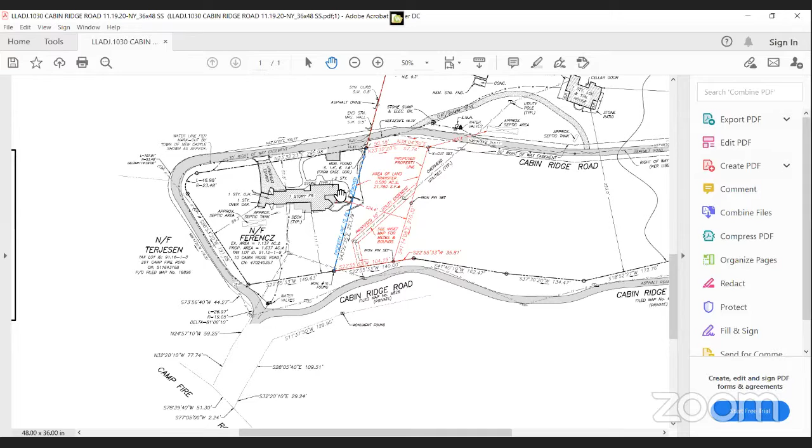Yeah, and I might also add that my wife and I have lived in this house for 46 years. And starting about 44 years ago, we tried to buy a half acre or an acre from the original owner. Never got anywhere. She passed away. We tried to buy it from her nephew who inherited it. Never got anywhere. But it's really been a dream of ours to have more land on that side, because if you notice, the house is really skewed in that upper right corner of the plot. And we just would like to have more green space, more forest, more of a buffer.

Good. Brad, the property between the property line and the roadbed, Cabin Ridge Road, especially down at the bottom, is that just the town easement? Is that what that is? It seems to be very substantial in some areas, especially down there. Yeah, Mr. Chairman, where the cursor is right now. Yep. So Cabin Ridge Road, we tried to pull some of the old maps. It's a private road. I'm not sure who owns it; this may just be part of the right of way of the paved Cabin Ridge Road.

But is there a right of way in that area from the Ferencz's house or from that property to go to that side of Cabin Ridge? Or are they restricted only going to... I don't see the directions here. I guess that's north. Yeah, the arrow, north is to the right. Okay. So that would be the east. They have access, that's west, I guess, up there. So that's where they currently have it. But then where you had the cursor before, Brad, would there be a right of access to Cabin Ridge Road in that area?

Great question, Mr. Chairman. I don't know definitively, presumably so. But I'm not aware of anything that would prohibit another curb cut here off of accessing Cabin Ridge Road. I don't know for sure. I don't know the legal status of this land between the paved Cabin Ridge Road and the property boundary.

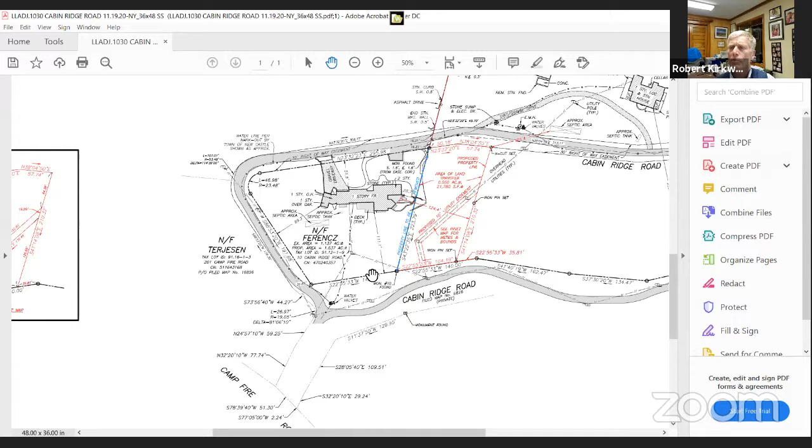Bob, so is there an HOA that owns this property, do you think? Yeah. Because it's private property that is owned by the community? Since it's a private road? Is that a question for me, Robert? Sure. No, I mean, I thought you said, I don't know. Sorry. I mean, I don't know. Like Brad said, the only way to find out who really owns it would be a title search, but it's certainly not owned in any way, shape, or form by the town.

Right. Okay. Well, another minor question, I guess, is if we assume for the moment that it's private property, a private road, and we're not sure about an HOA, if there is one, on the bottom part of the circle that we're just talking about, right in the same area, if there's an owner there, has that owner been brought into this, that something is happening here? That owner should be notified, right?

Correct. When it goes to public hearing, we will circulate notices. And if there is an owner of that property that is in our tax records, we'll identify. Okay. Well, the issue I'm raising is, we certainly understand and appreciate the Ferencz's interest and their desire here in their application. But at some future point, with this now combined, is there enough space to subdivide this further so that you had some sort of driveway to the east, that area on Cabin Ridge Road, so that this could be subdivided further?

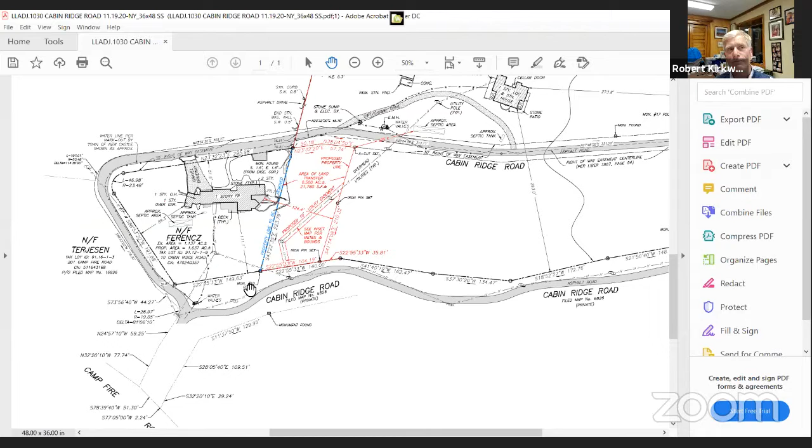Is there enough space? Is this R1A? Yeah, this is a 1 acre zoning district. And so in total, the new property would measure 1.6 acres. Okay, so it's still insufficient. Okay, thank you, Brad. Well, insufficient unless we find out that this other property somehow is developable in part of these parcels, almost by default.

If I could just make a comment on it, we have surveys that go back to 1936. And this land down in that corner is not owned by any homeowner. It actually is the water distribution as the water comes in from Campfire Road underneath Cabin Ridge. And then the water supply for virtually all the residents but one who has a well comes from this area and then is distributed to all the houses.

Odd. I mean, not that the water runs through there, but it's odd that no one owns it. Well, it's got to be owned by something or somebody. Exactly, yeah. So it seems to me it's probably some local association that must have ownership of it. But I understand what we're saying, Bob, but in order for that to be developable under any case, the applicant would have to come back and move that property line. Correct. Unless through some sort of legal operation that has become attached to his property. So it can happen. And it's just very unusual.

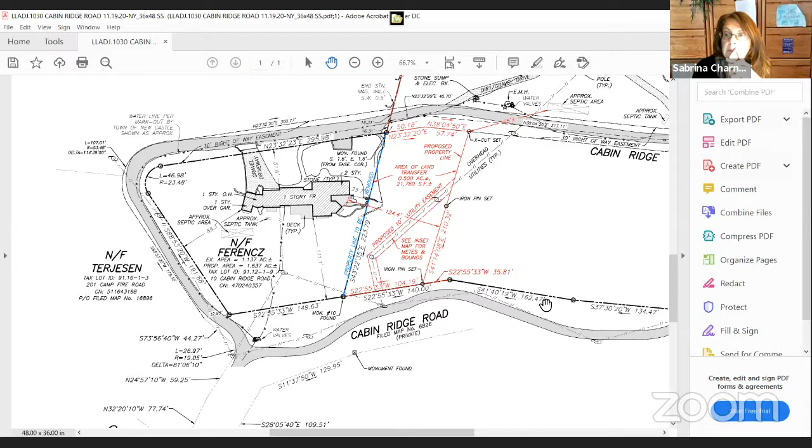And in accordance with section 113-3, the planning board can waive jurisdiction and consider this application both a preliminary application and a final subdivision. So you can do that at the same time. And given all of the information that's been provided, I would recommend a public hearing to move this forward. Right. Okay. Any other thoughts from anyone on this application? I had just one question. Sure. Does anyone know what that area is of that piece of land that we're not sure who it belongs to? I think that the applicant should provide us some information about that prior to the public hearing.

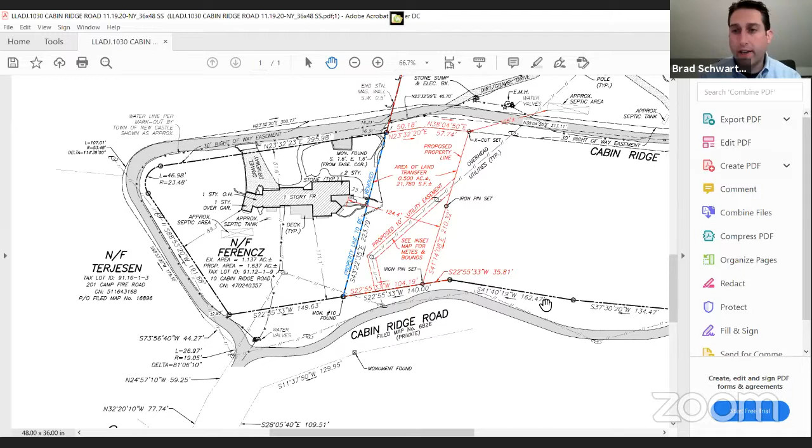And Brad, the question is, is this something that you can do? And then it may affect the date within which the board holds the public hearing, because I think you should have that information before then. Yeah, let us look into it some. Let me see what I could quickly gather from public records. I would be hesitant, if it's okay with the board, to engage in a full-blown title search if I can quickly and easily ascertain who owns that land. We're certainly not asserting any rights to that property. Right. So let's see what we can pull from old file maps and prior title. And Sabrina, I'll circle back to you and let you know what I've found.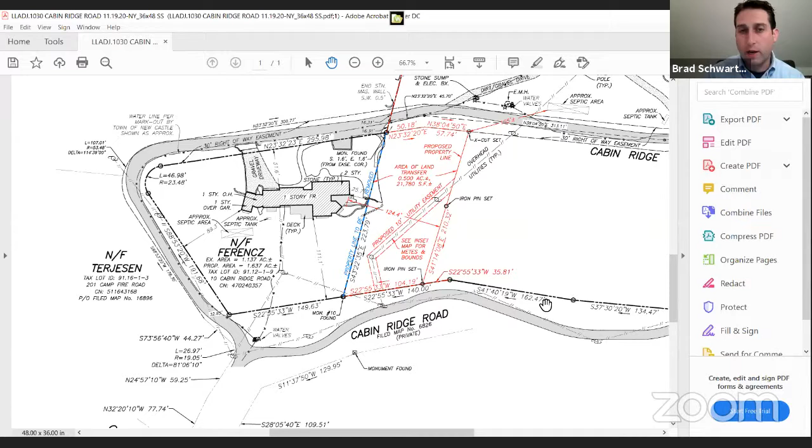And we could also check the tax records, as you mentioned earlier. We would have to notify whoever owns that property anyway. So let's see what comes up simply by checking the town records as well. Yeah. So then I'm just curious to know what the acreage is. That's all, really. Yeah. So Brad, in addition to finding out, if you could get some area dimensions on that, it would be helpful. And then I would recommend, Brad, if you thought that you could have this additional information into my office by December 14th, or at least have a good direction to it, then I would recommend that the board set the public hearing for January 5th.

I am curious about this drawing for a second. I'm looking at the Loop Road, the top. It shows a 30-foot right-of-way easement for that road, and it continues all the way around to the left down to the Y intersection, and then it just sort of disappears. Is it that there's a 30-foot easement for the road, which is just not drawn on that section, which goes from where the cursor is to the right? Yeah, that's my best guess, Mr. Curley, that easement continues until it meets up with Camp Fire Road.

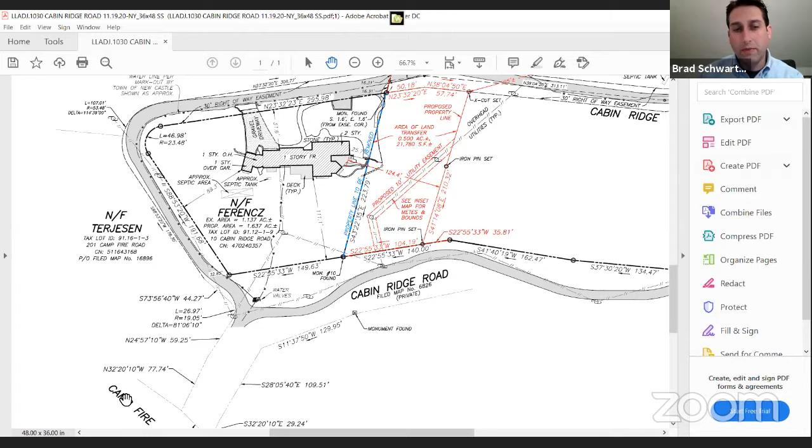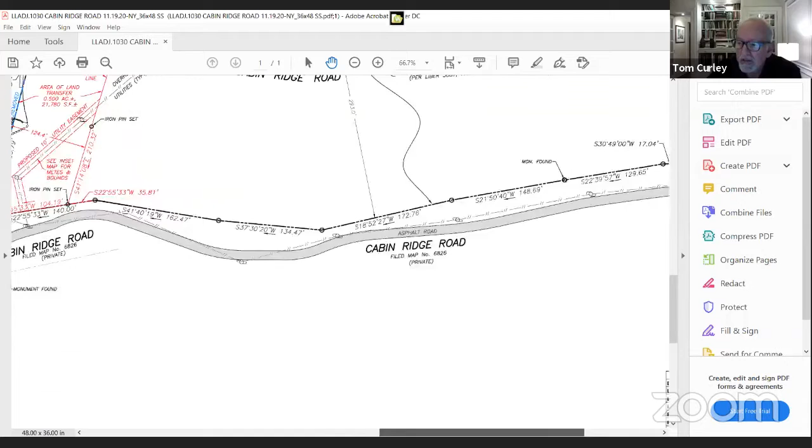Well, it continues all the way around to the right also, doesn't it? Yep, it's circular. Yeah, all the way around, I would guess. Yep. I mean, it's not drawn, but right. But I'm wondering if that also might be one of the things that would constrain any future development in that section, which is what we've been talking about. Move your cursor to the left.

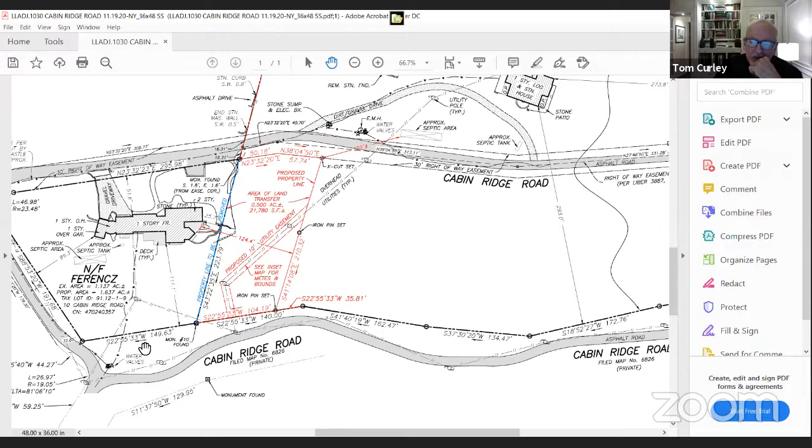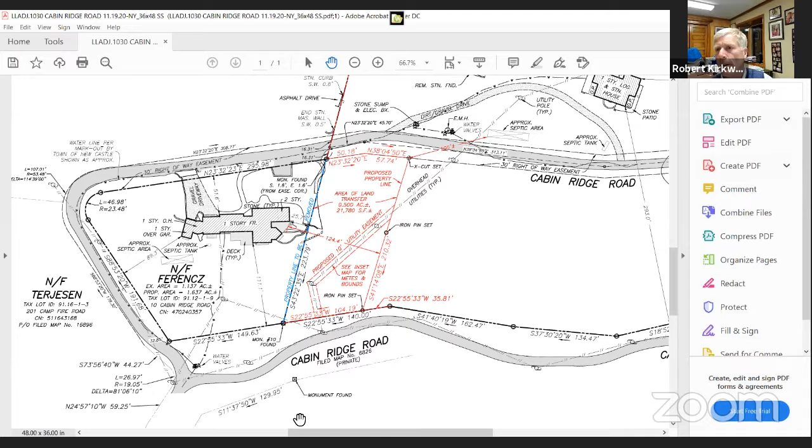Over in there, I mean, there are going to be constraints to anything anybody would be able to do there probably anyway, if there was a common roadway easement for Cabin Ridge Road through there. Right. I'm just suggesting that it's much less of a concern than it needs to be. And I don't think that we ought to go to any lengths that might cause inordinate costs in chasing this down, or time in chasing this down. I agree. I think that makes good sense. I think Brad has indicated he'll take a quick look, but again, to go through a full title search on this is, I think, crazy.

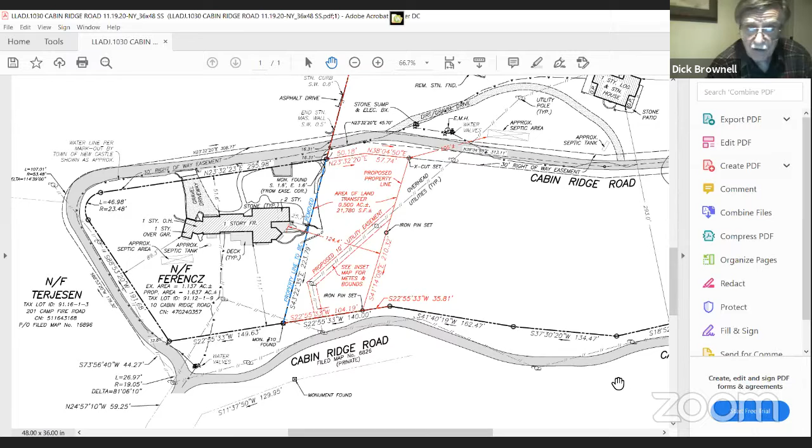Yeah, the only other thing that I think would be nice, I appreciate that we have an aerial and you probably can zoom down and get some better shots as to what the leaves off looks like from the top. But it would be nice if we had some photos that indicated what the property looks like from the roads that go around, so we can get a sense of that. Sure. It would be sort of like a site visit. Yep. We could take some photos and just put it on a board. Okay. Or I guess a PDF it would have to be. Yeah.

So with that, Sabrina, I'm sorry, could we have the public hearing on the 15th? Whatever I find out in terms of the title to the no man's land, I'll get that to you within a week or so. I think that's up to the board. You said the 15th or the 5th? 15th of December, right, Brad? 15th. Next meeting? Well, we don't have any additional work or anything else to look at, so we'll have a couple of updates on the sketching and some information. There's not a whole lot of material to go through. So I'm perfectly fine to try to do that if the applicant can do it. And if you have any need to close this deal before the end of the year, that might be helpful to you.

Well, it is, to that end. Is it inappropriate to ask for a draft resolution? That was going to be my next question. You're welcome. We really work as a team here. I think that's appropriate. Others? I think the advice should come from Sabrina as to when a draft could be done.

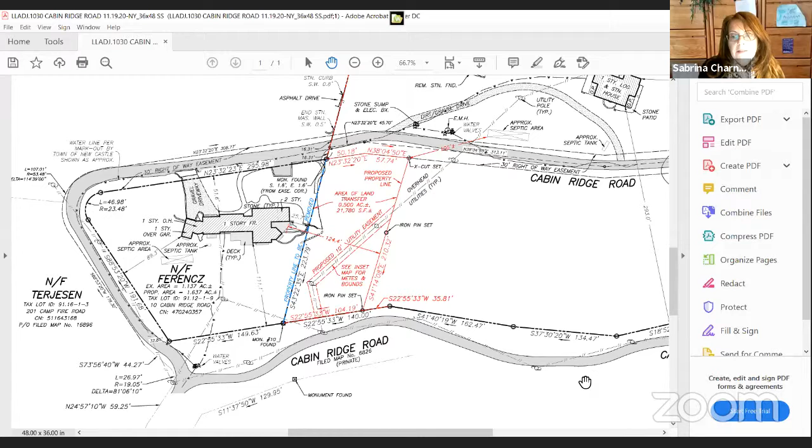Brad, is there any time constraints on behalf of your client? I was just going to say that, Sabrina. Look, if there was a real need, I would push respectfully. Enjoy your vacation. I respect everything you just said. I'm not sitting here tonight saying we have to have it by December 15th. If we could have the hearing, that would be great. That we could advance, and we'll deal with the resolution in January. Okay. Okay, fair enough. Thank you, Brad.

Thank you. So we'll schedule this then for a public hearing. Do we need a motion for that to schedule the public hearing for December 15th? Yes. Do we have a motion to support that? So moved. Second? Second. All in favor? Yes. Aye. Aye. Aye. Any opposed? Okay, motion's carried 5-0. And so we will see you, Brad, on December 15th. Terrific. Thank you. All right. And good night. Okay, thank you.

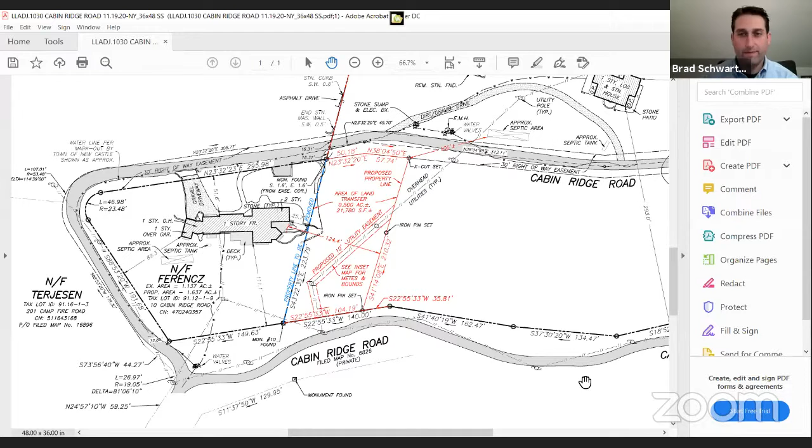Okay, we have minutes. How many minutes do we have? We have hours of minutes. Good, nice to know. So we have September 22nd. I'm going to suggest that unless we have something that's really substantive, but if you have grammatical changes, I think it's worked pretty well to send those to Felicia and not take the extra time. I think it's more efficient for her as well. Thank you, Felicia, because you're really getting these up to speed here, and we're really in pretty good shape, pretty well caught up. So does anyone have anything that is really substantive, that is, just a clear misstatement or something that has to be corrected that we need to hear about?

I don't. No, I do have comments of things that appear to be not stated correctly, but I don't think that they are anything that needs to be brought to the full board's attention. Okay. Anyone else? I have one comment, and it's minor. Mm-hmm. So I'll send it to Felicia. Okay. All right. So the four of us can vote on these minutes because we were here. We were here. Yep. We were here. Right. So subject to non-substantive changes, but textual grammatical changes only, is there a motion to adopt the minutes of September 22nd? Motion. Okay, thank you. Second? Second. Okay, all in favor? Aye. Aye. Aye. So that is passed 4-0.